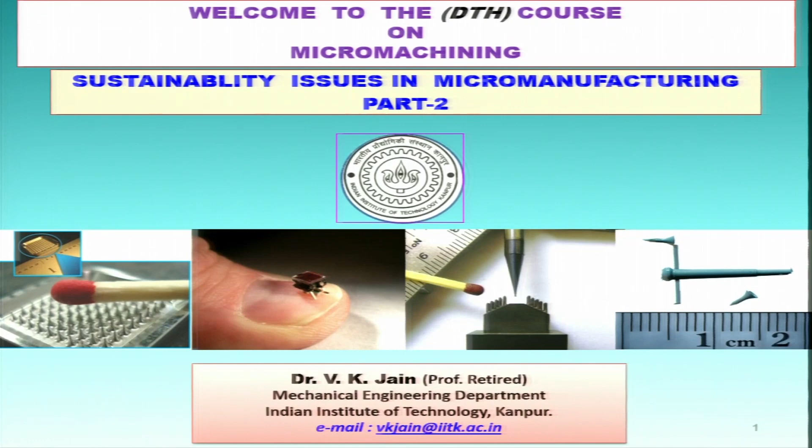Welcome to the DTH sponsored course on micromachining. This is part 2 of sustainability issues in micromanufacturing. Acknowledgement to the lecture by Professor Anshudhar Chayal, a chapter written by Professor Anshudhar Chayal of IIT Ropar, and a chapter written by Professor M. Ravi Sankar et al. from IIT Tirupati, who has also shared some of the slides for his lecture delivered on sustainability issues.

Now this is my last lecture in this course, so I will once again like to share this slide with all of you: to fulfill your ambitious dreams, be honest, sincere, hardworking, and have junoon, that is passion, towards your objective. This will be very useful learning for your career.

What has been done in part 1 of sustainability issues in micromanufacturing? If you recall, we discussed two major issues and the definition of sustainable futuristic manufacturing. Note it carefully: futuristic manufacturing has to be sustainable manufacturing if it is to survive for a long period. We also discussed miniaturization and green manufacturing.

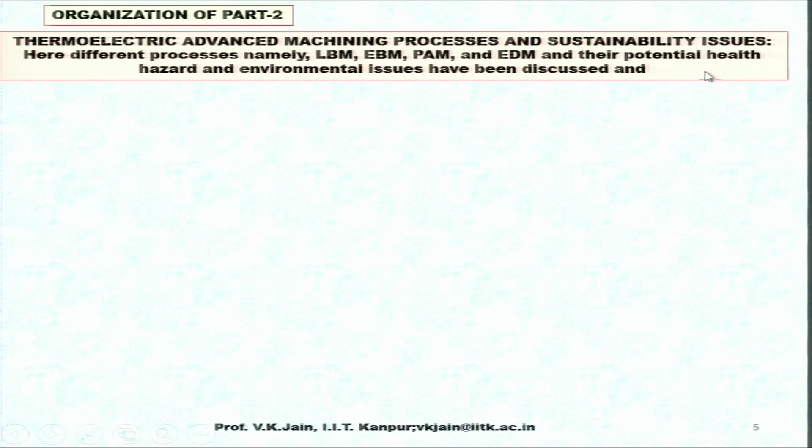Now, organization of part 2: we are going to discuss in detail thermoelectric advanced machining processes and sustainability issues, which will include laser beam machining, electron beam machining, plasma arc machining, and electric discharge machining, and their potential health hazards and environmental issues will be discussed in this particular part.

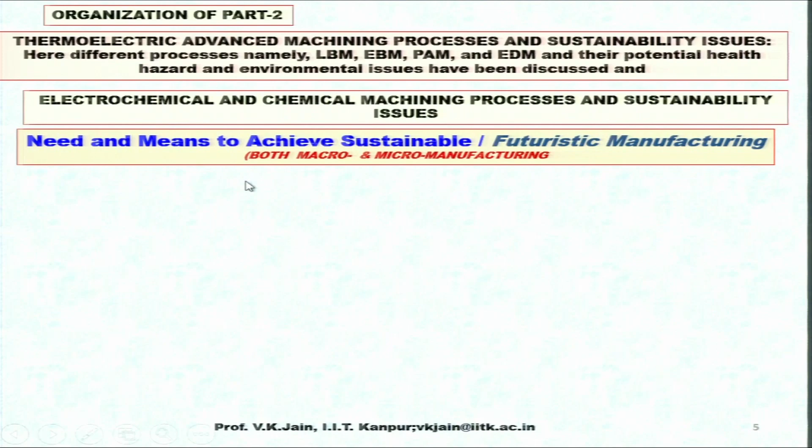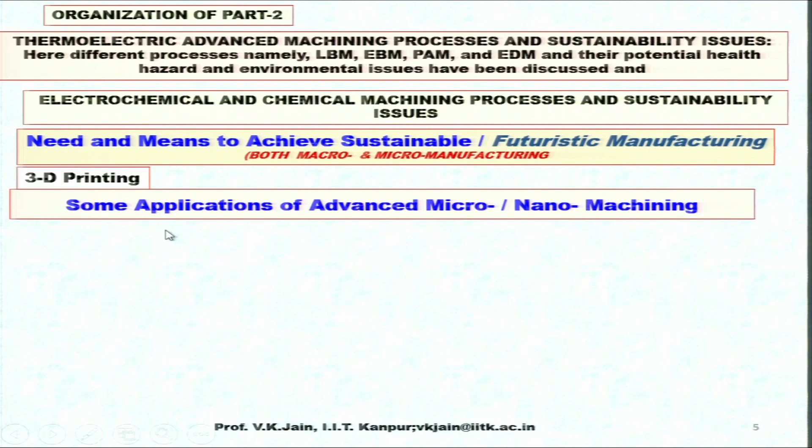Electrochemical and chemical machining and micromachining processes and sustainability issues, the need and means to achieve sustainable futuristic manufacturing. We will discuss 3D printing, some applications of advanced micro nano machining, and conclusions.

Thermoelectric advanced machining processes and sustainability issues. Plasma arc machining and sustainability issues.

The arc energy is absorbed by the workpiece material and it produces a high temperature above the melting point of the workpiece material. Under these conditions, the work material quickly melts and may even get vaporized.

I am not going to discuss the working principle of any of these processes. I presume you have already gone through advanced machining processes or micromachining, where I have discussed their working principle with reference to micromachining. For machining organic materials by plasma arc machining, it necessitates large amounts of inert gases which are harmful to the operator and the environment.

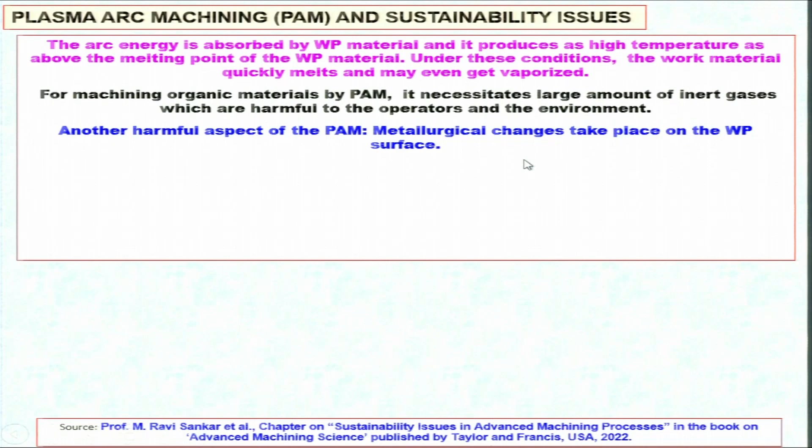Another harmful aspect of plasma arc machining: metallurgical changes take place on the workpiece surface. When it is melting and vaporizing, definite metallurgical changes are taking place on the surface and subsurface of the workpiece material. In plasma arc machining, volatile product formation takes place, evaporation takes place of the workpiece material.

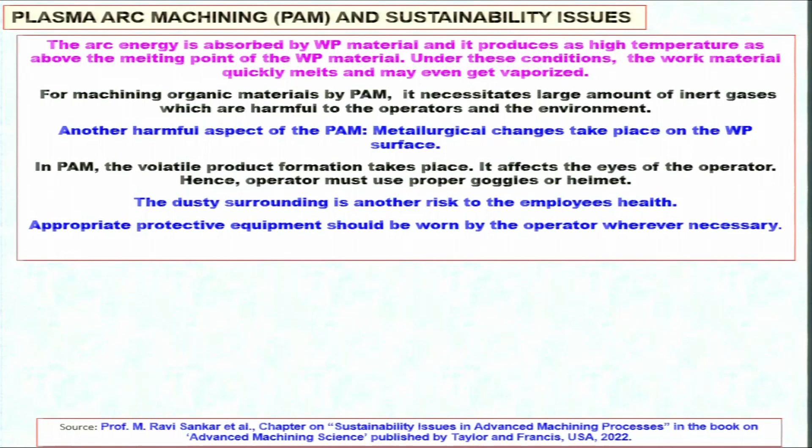It affects the eyes of the operator, a very important issue, and one has to be very careful. Hence, the operator must use proper goggles or helmets. The dusty surrounding is another risk to the employee's health, and appropriate protective equipment should be worn by the operator wherever necessary. This becomes the responsibility of the operator, not to work on these processes without appropriate protective equipment, just like goggles, helmets, etc., whatever is required.

You can see here, this is the plasma gun, the plasma arc is there, and you have dust uplifted due to plasma jet velocity in this tube. You can see particle-plasma interaction taking place here, leading to particle inhalation. Once this inhalation by the operator takes place, you can see micro nanoparticles going inside the human body and creating a lot of problems for the operator, and not only the operator but also the workers or people working surrounding this particular equipment. So you can see here dust inhaled due to plasma jet velocity.

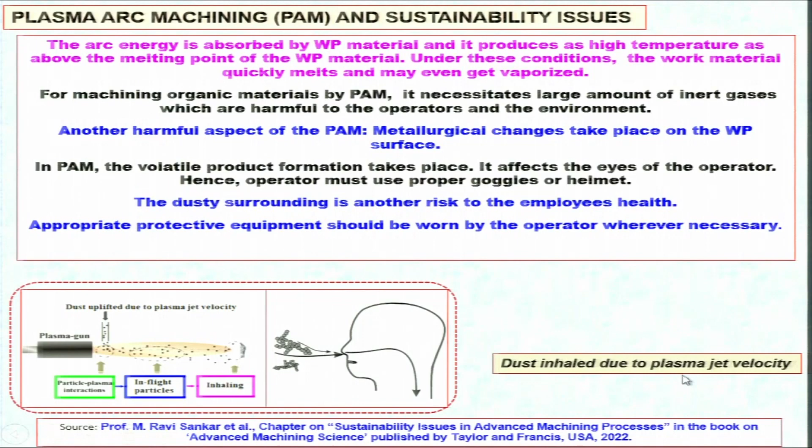Laser beam machining and sustainability issue. Laser beam machining and laser beam micromachining is one of the most popular micromachining processes, and we should understand the hazards from this particular process.

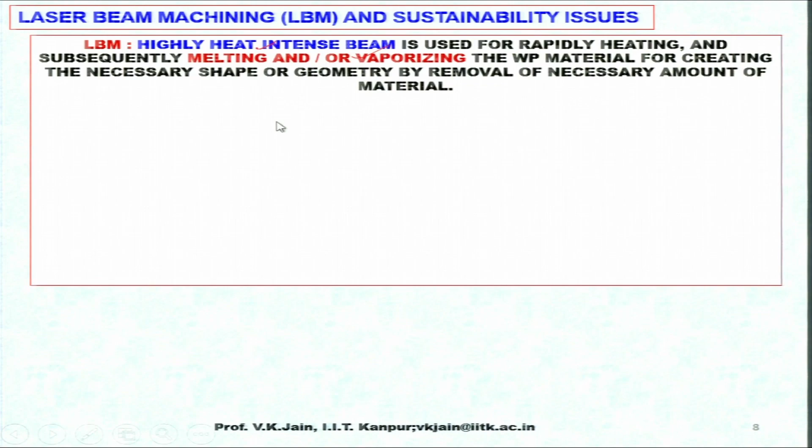Laser beam machining uses a highly heat intense beam. It is used for rapidly heating and subsequently melting and/or vaporizing the workpiece material for creating the necessary shape or geometry and dimensions by removal of the necessary amount of material. So you can see carefully, melting is taking place and vaporization is also taking place, and because of vaporization, fumes will be there in the surrounding, and operators and persons standing around this equipment have to be very careful.

Single or repeated exposure to certain wavelengths of the laser damages the skin and other body parts. So one has to wear proper clothing, etc., to safeguard from this.

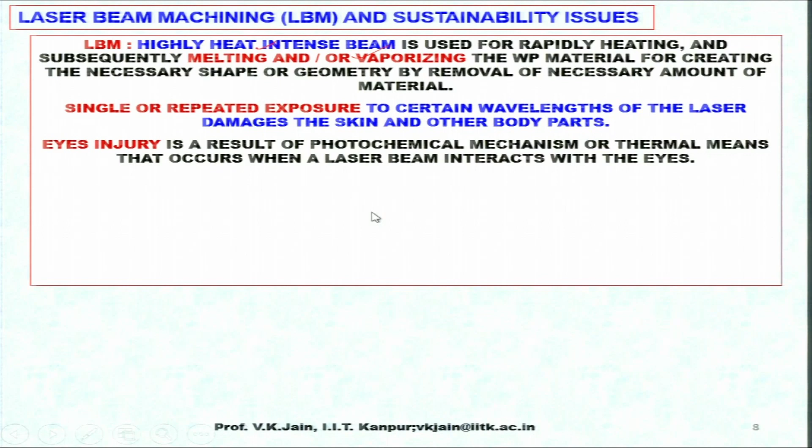Eye injury is a result of photochemical mechanism or thermal means that occurs when a laser beam interacts with the eyes, and this is very highly possible damage that one can have in the eyes because of little bit of carelessness on the part of the operator or the person surrounding there.

For minimizing the probability of laser beam exposure, a set of protocols and regulations designed for this purpose should be strictly followed. These protocols and regulations should be strictly followed, otherwise you are putting yourself into danger.

If a beam enters into the eyes, the power of the beam is concentrated with the aid of the lens within the eyes about 0.1 million times more at the retina. Hence, even a small amount of the laser beam leads to big damage to the eyes. So this is a warning to the operator and those who are using this laser beam for some other purposes also.

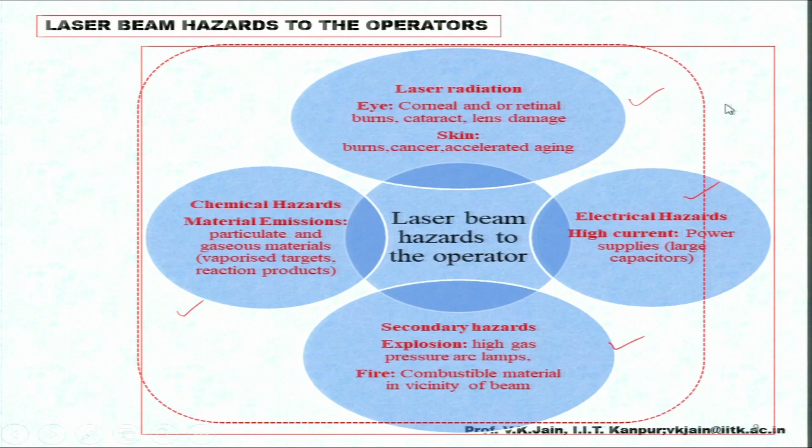Electron beam machining and sustainability issues. In electron beam machining, again very much useful for micro nano machining purposes, not so commonly used for macro and meso machining, a stream of large number of electrons moves as a small diameter beam towards the anode, that is the workpiece material.

The workpiece attains very high temperature by the bombardment, meaning the workpiece gets melted and/or vaporized depending upon the thermal properties of the workpiece material. In the bombardment area, the high velocity electrons move close to the light velocity.

So you can calculate, whatsoever small is the mass of the electrons, or negligible mass of the electrons, it is moving with the velocity of light. So half mv square you can calculate as the kinetic energy, which will be large enough. So the high velocity electron beam strikes the workpiece, the kinetic energy of the electrons gets converted into heat. This heat is responsible for melting and vaporization of the workpiece material.

So it is a very good process for micro nano machining feature creation. Electron beam machining is a cleaner process of machining, but the interaction between the workpiece material and the beam of electrons

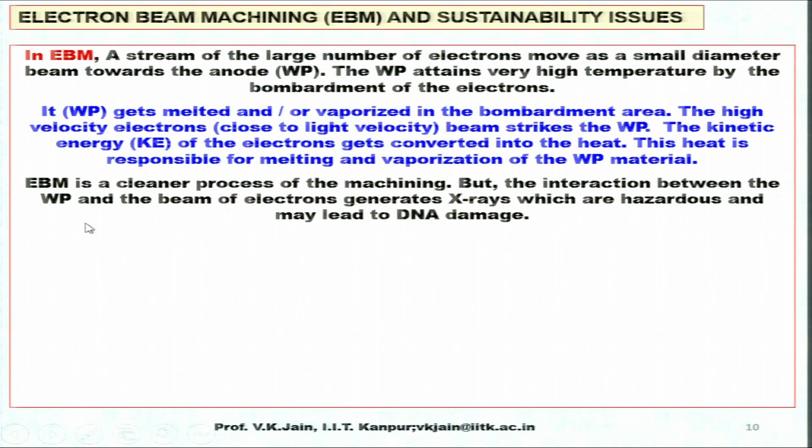generates X-rays which are hazardous and may lead to DNA damage. This is another high disadvantage of this particular process. DNA damage is of primary concern for health and safety of the operator in case excessive leakage is there.

Measures that should be taken into consideration for preventing any hazards of health: first thing is install the setup within an enclosure properly. This is very, very important. All the setups related to this should be installed in a properly made enclosure.

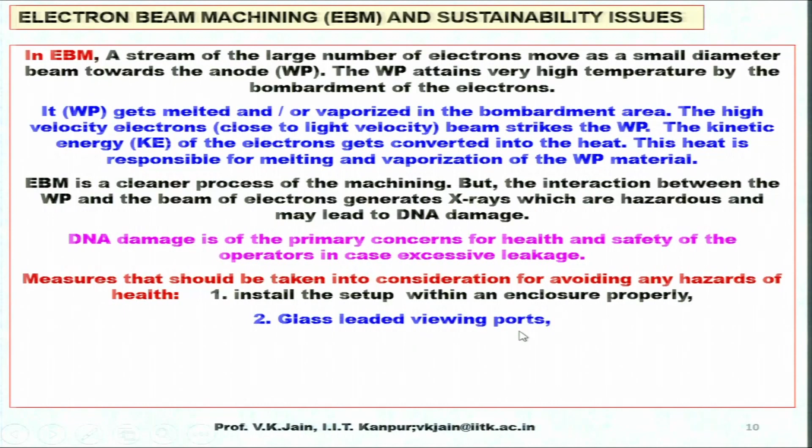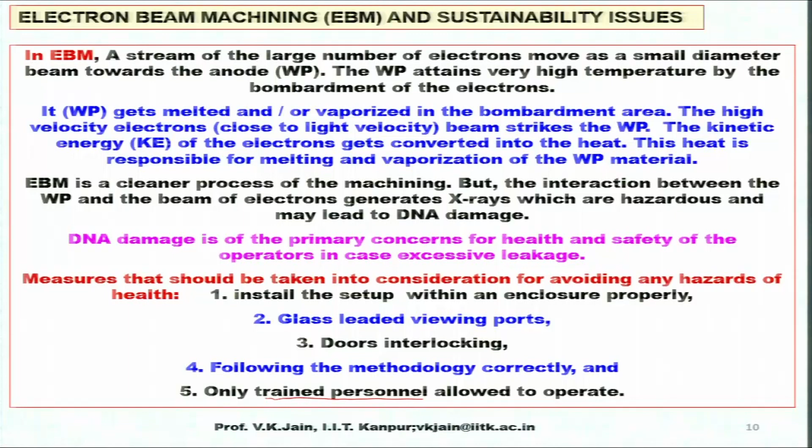Then a glass leaded viewing port should be there. You should not directly view the beams, etc. Glass windows should be there for viewing the workpiece as well as the beam. Doors interlocking should be there, and the methodology should be followed correctly, and only trained personnel should be allowed to operate. Please note it, only properly trained personnel or operator should be allowed to operate this particular equipment.

Electron beam machining and health hazard continues further. Another potential hazard associated with electron beam machining is the generation of dust due to vaporization of metallic workpiece material.

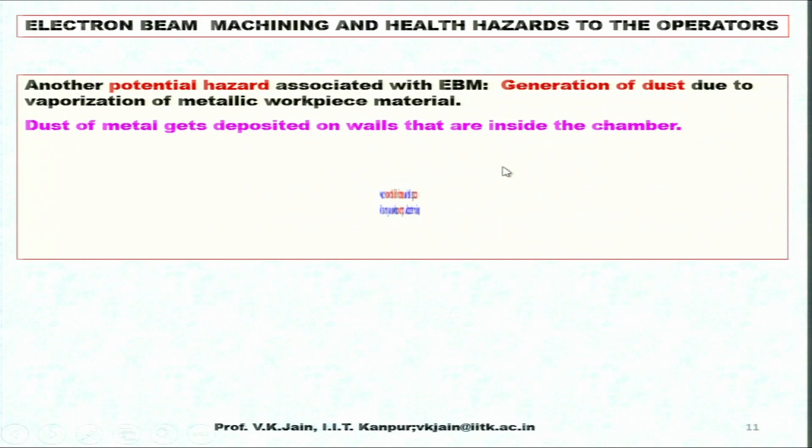This is another very important but worth noting hazard. Dust of metal gets deposited on walls that are inside the chamber. The operator is exposed to the dusty environment when the workpiece is positioned in that particular chamber before machining, and also

when collecting or taking out the workpiece from the chamber after machining is over. The operator is getting exposed to that environment, so he or she should be careful not to get hurt from a health point of view. High voltage associated with the electron gun also presents potential health issues due to electric shock.

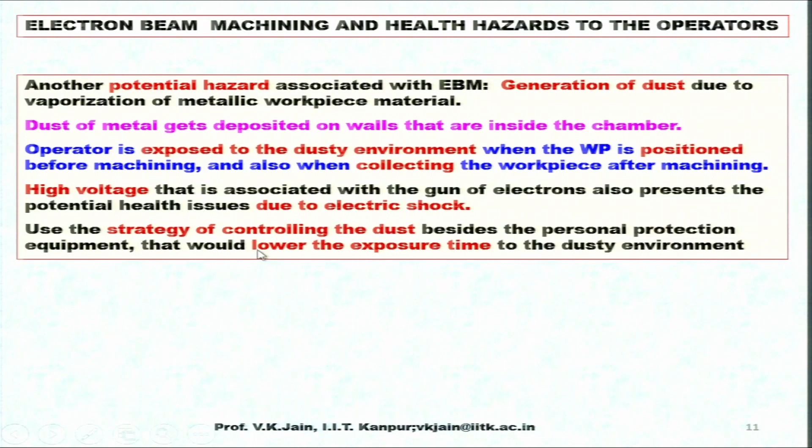Use the strategy of controlling the dust, besides the personal protection equipment, would lower the exposure time to the dusty environment. So all these precautionary measures should be carefully taken, carefully imposed, and this becomes really the responsibility of the concerned higher authority in those industries.

Electric discharge machining and sustainability issues. EDM is one of the processes most commonly used on the shop floor of small scale industries, large scale industries, as well as medium scale industry. So the health hazards should be very clearly understood, and necessary precautionary measures should be imposed in all industries for the benefit, for the welfare of the employees.

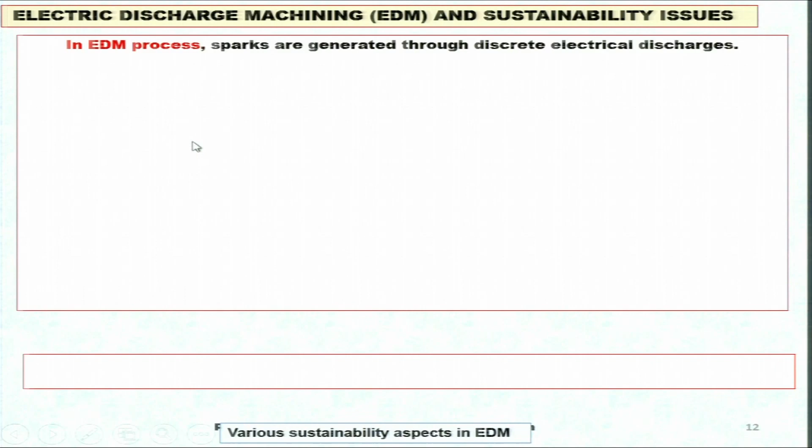In EDM process, sparks are generated through discrete electrical discharges. They ionize the dielectric medium, which may be kerosene or other oil, mineral oils, or even water, and generate a plasma column between the electrodes, that is anode and cathode. The sparks, that is plasma, result in extremely high temperature in the range of 8000 to 12,000 degree Kelvin. It locally melts and even vaporizes the workpiece material to remove the material.

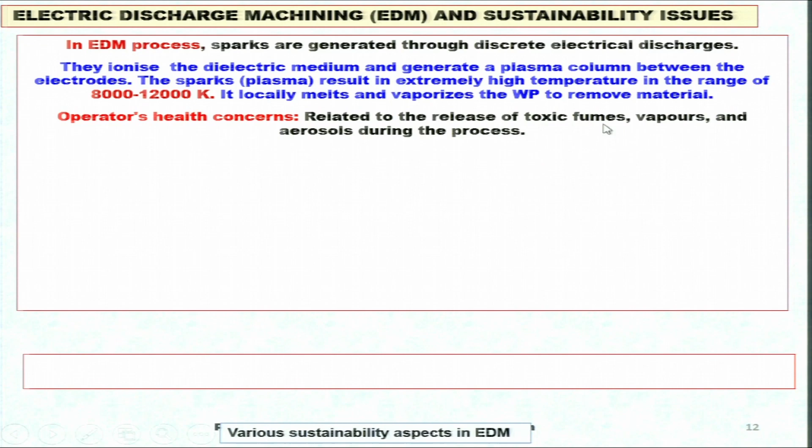So operators' health concerns are related to the release of toxic fumes when machining, depending upon the workpiece material. Different toxic fumes are generated and evolved, and many times operators are exposed to them if a proper exhaust system is not there. So these are related to the release of toxic fumes, vapor and aerosols during the process.

Poor functional safety may result in fire hazard. In many industries, fire has taken place due to this EDM process, so one has to be very careful. Electromagnetic radiation is another hazard.

Unwanted outcomes include radiation, noise, eroded particles from the workpiece and their emission. Dielectric fluids of synthetic and hydrocarbon based oil emit benzene fumes and vapors, polycyclic aromatic hydrocarbons. So these are all harmful to the operators and the people standing around it.

Other harmful byproducts include non-specific aliphatic hydrocarbons, mineral aerosol vapor due to degradation of oil and dissociation of their additives, and dielectrics are responsible for the risk of fire explosion, hazardous emissions, sludge generation, toxic waste, high specific energy, uneven electrode wear, poor surface characteristics and slow machining rate.

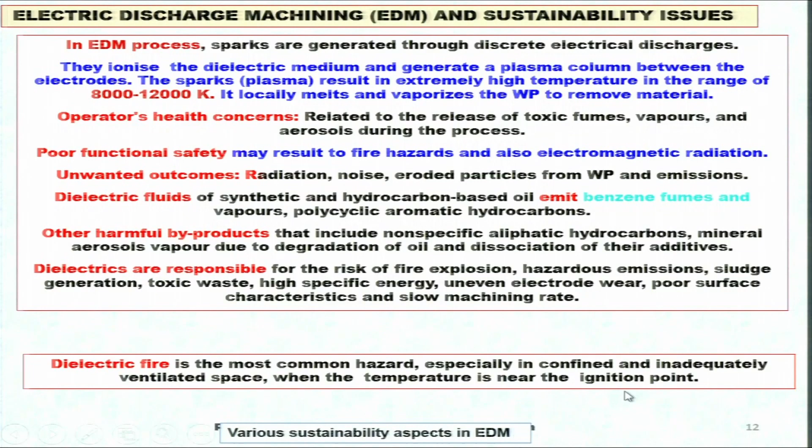Dielectric fire is the most common hazard, especially in confined and inadequately ventilated space when the temperature is near the ignition point.

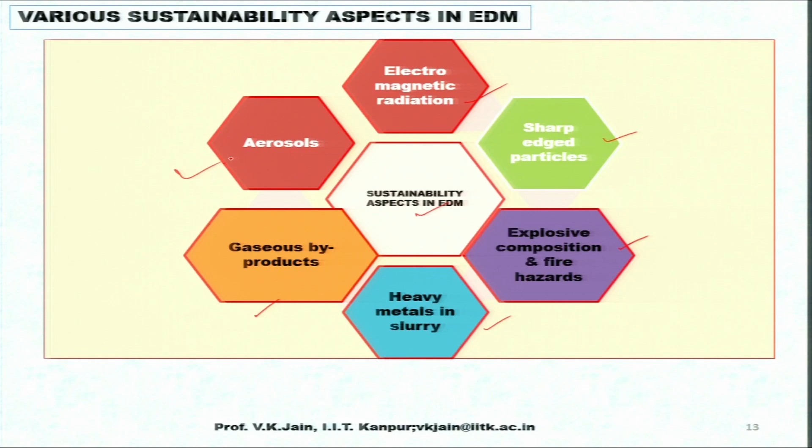Explosive composition and fire hazards, heavy metals in slurry, that is dielectric, gaseous byproducts. With this you should very carefully filter out and process before reusing the dielectric, because dielectrics are always resupplied or reused, and they are quite expensive. So there are various sustainability aspects in the EDM process.

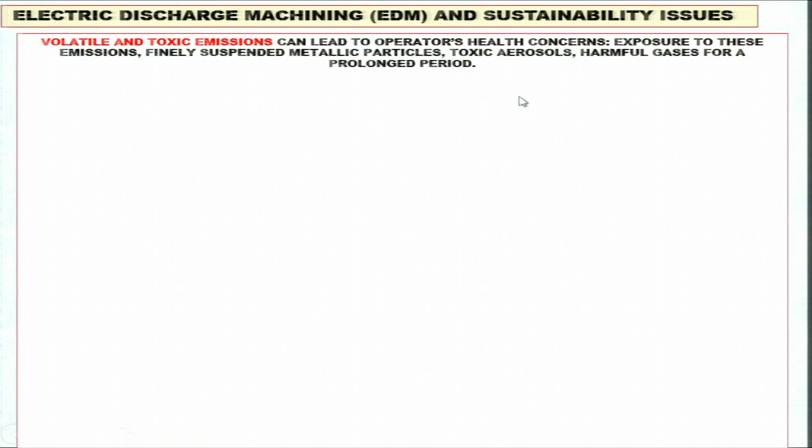Volatile and toxic emissions can lead to operators' health concerns. Exposure to these emissions, finely suspended metallic particles, as we have seen in the earlier slide, toxic aerosols, harmful gases for a prolonged period - if you are subjected to harmful gases and all these particles for a longer period, you may definitely have some or other kind of health problems.

So be careful, use proper equipment to safeguard yourself. Flammable and combustible dielectric and dangerous electromagnetic radiation are additional sources of hazard, because earlier kerosene was quite commonly used for this particular purpose, not now.

Other oils are also used for this purpose, and they should not be used here for the safety of the operator. Now manufacturers are making dielectric themselves and supplying it with the EDM machine, so that some of these hazards are taken care of and do not occur.

EDM using dry gaseous dielectric results in numerous environmental and health concerns, such as micro nano debris in the breathing environment, sometimes interacting with mucus, foul smell of dielectric, etc.

In EDM with oil based dielectric, carbon content on the machined surface is roughly 4 times higher, while with deionized water the carbon content is 50% less. So in most wire EDM processes, mostly deionized water is used as the dielectric, and in EDM also at some places, users are using deionized water as the dielectric.

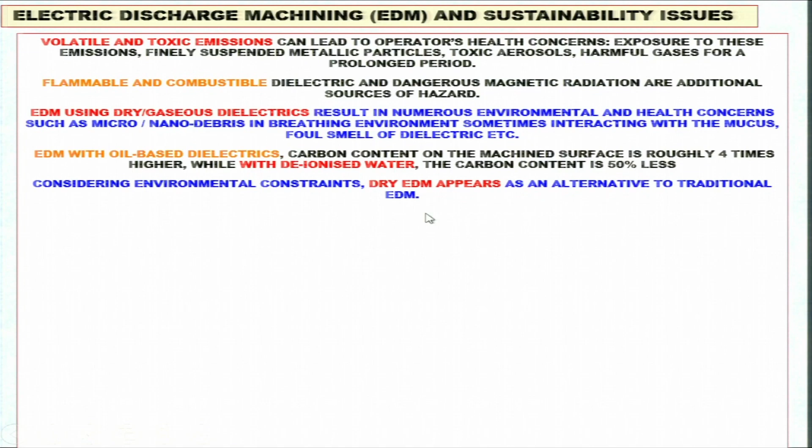Considering environmental constraints, dry EDM appears as an alternative to traditional EDM. Some research work was done long back, 20 years back or so, at IIT Kanpur also, performing dry EDM and looking into the merits and demerits of the process, accuracy of the machined component and shape, etc.

That was published also in some journal, I don't remember exactly at present. Hydrocarbon dependent dielectrics contribute significantly to environmental hazards. Henceforth, alternative dielectrics such as water dependent, gas based and dry EDM techniques have also been researched. When we conducted such dry EDM experiments long back, say 20-25 years ago, we emphasized why and how dry EDM is useful.

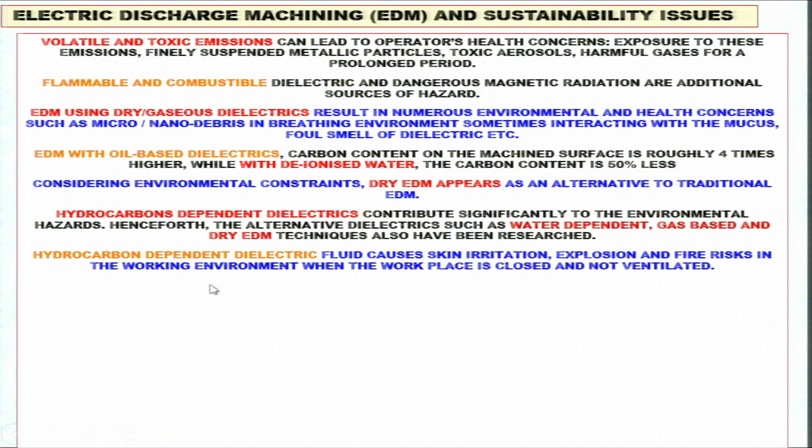But there are certain problems with dry EDM that can be overcome by researchers. Hydrocarbon dependent dielectric fluid causes skin irritation, explosion and fire risk in the working environment when the workplace is closed and not ventilated. This ventilation issue is one very big problem, and if not properly ventilated, you are unnecessarily inviting health hazards for the operator and persons working around the machine.

Let us see neem oil as dielectric. It minimizes the chances of gas emission during machining, and it aids in creating an oxide-free, hygienic breathing environment. Neem oil can be easily obtained, and though I don't know the exact price, I hope it should be cheaper than other oils, and it has many merits to be used as a dielectric. However, it really needs further research before its common use in the EDM process.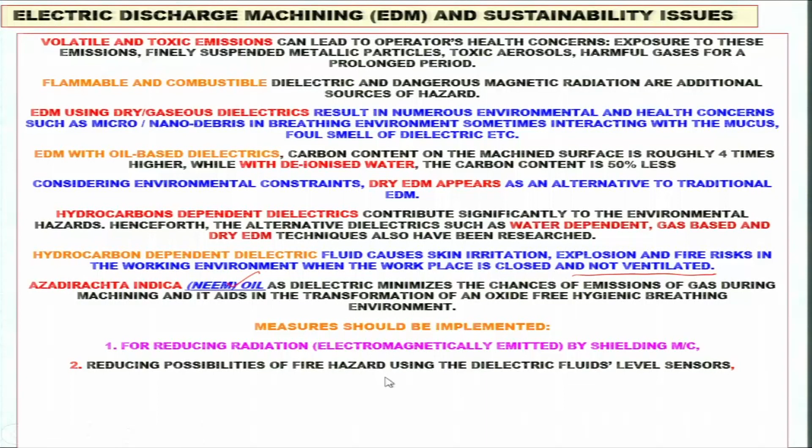What measures should be implemented for the safeguard of operators? For reducing electromagnetic radiation emitted, by shielding the machine; reducing possibilities of fire hazards using proper dielectric fluids and level sensors; avoiding the use of dielectrics having flash points of 65 degrees centigrade or below; applying suitable disposal of waste, which is another very important point; and raising awareness of operators for not using high voltage resulting in severe injuries or sometimes even death of the operator.

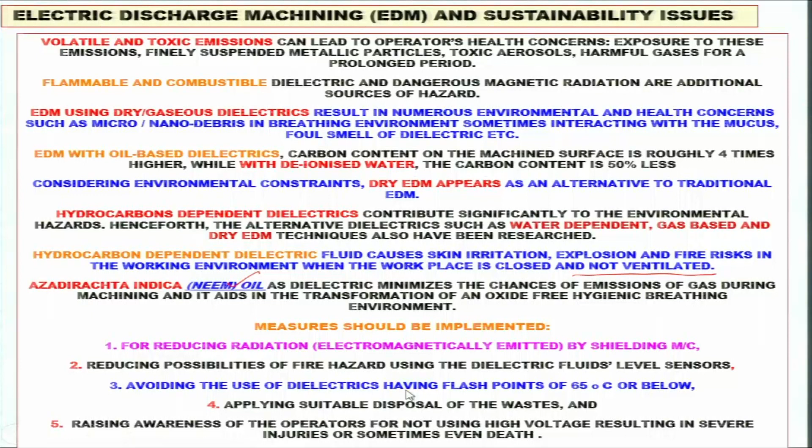So really speaking, I very strongly recommend you follow all these measures for the safety of the operator and surrounding people, and also not only operators or human beings, but also the equipment placed near such machines.

Conclusions: focus on improved technology R&D and on sustainable manufacturing is essential to enable sustaining our quality of life and safeguarding the environment. In the case of micromanufacturing, there is a serious lack of attention to this issue on the part of industrialists, government and policy makers in general, and researchers in particular.

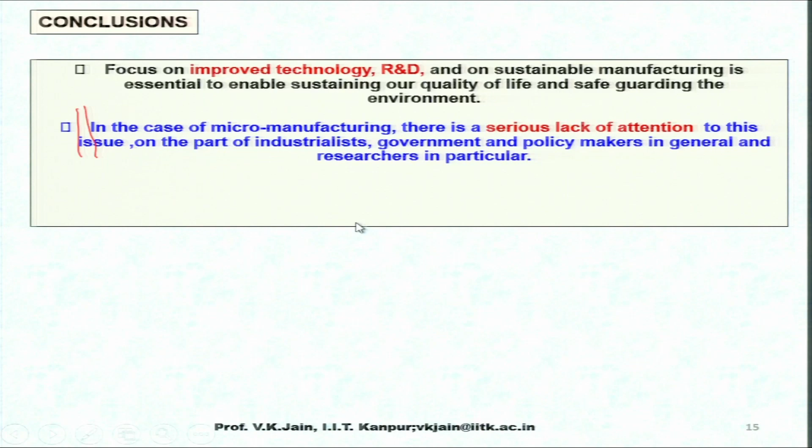I very strongly agree with this issue because I have not seen so much emphasis being given by industrialists investing additional money. Also, the government and policy makers are really least bothered about these issues, which is really not good.

Several strategies are possible, however, due to the complex nature of the market, very few broadly applicable solutions are evident. That is what I have just told you. Other than facility upgradation, process scale up and process optimization, which is being done by researchers, least is being done by industrialists, government and policy makers.

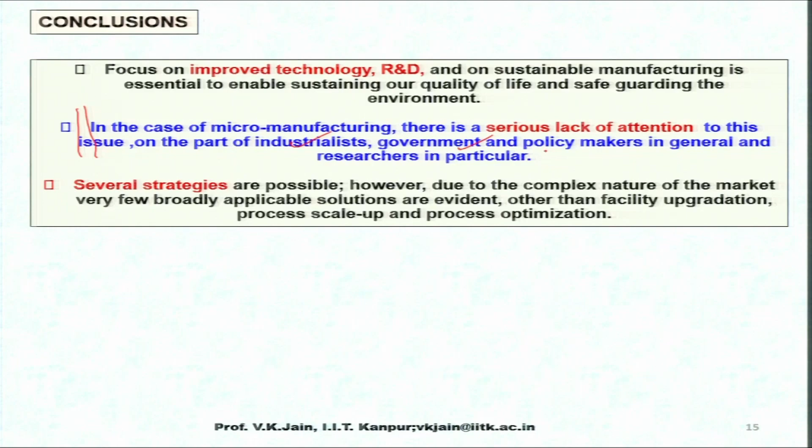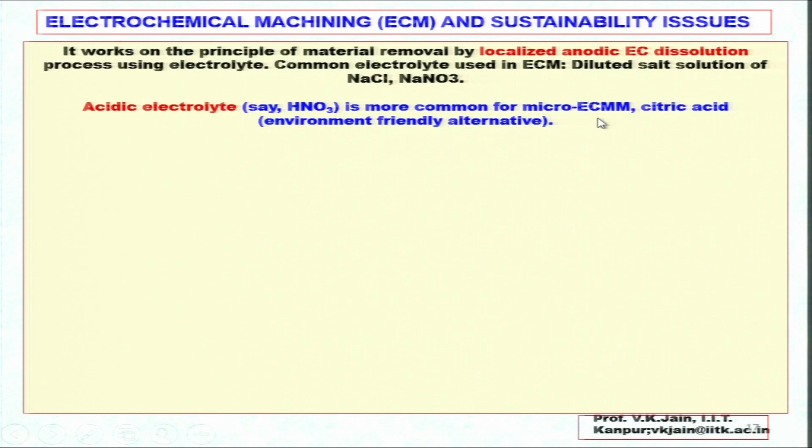Now let us take electrochemical and chemical machining processes and sustainability issues. It works on the principle of material removal by localized anodic electrochemical dissolution using an electrolyte. Common electrolytes used in ECM include diluted salt solutions of NaCl, NaNO3, etc. Acidic electrolytes such as HNO3 are more common for micro electrochemical machining. Citric acid is an environment friendly alternative.

This process produces many byproducts such as sludge having traces of heavy metals, metal ions, oils, nitrates and harmful acids. The electrolyte is contaminated by heavy metals and chemically altered byproducts such as hazardous ammonia, chromate and nitrate, because as we already discussed, during electrochemical reaction many types of byproducts are produced. They are known as sludge, and some of them are really harmful.

An efficient local exhaust system should be used so that hydrogen gas is kept below its lower limit of flammability and aerosols are kept out of the operator's respiratory tract. So a proper exhaust system in all kinds of manufacturing processes is always required.

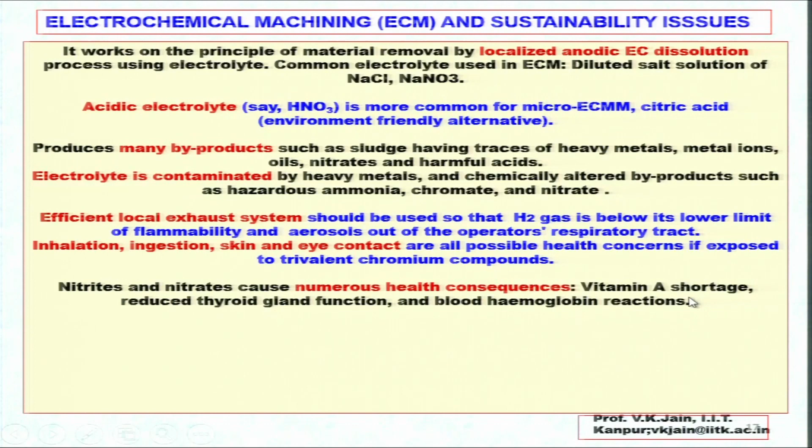Inhalation, ingestion, skin and eye contact are all possible health concerns if exposed to trivalent chromium compounds, and if machining is being done, you are going to have these compounds formed. Nitrites and nitrates cause numerous health consequences such as vitamin A shortage, reduced thyroid gland function and blood hemoglobin reactions. Toxic vapors generated during electrochemical dissolution of the workpiece material, electrolyte contamination and splashing are various occupational health hazards.

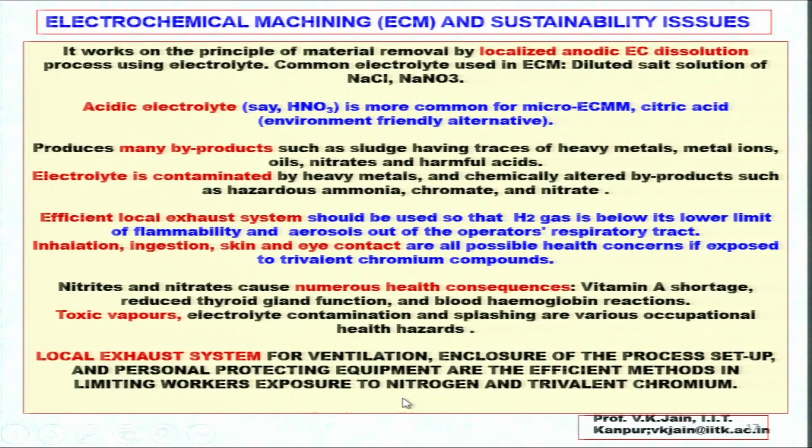Local exhaust system for ventilation, enclosure of the process setup, and personal protective equipment - all three are very important. Ventilation, enclosure of the setup and personal protective equipment are efficient methods in limiting workers' exposure to nitrogen and trivalent chromium.

We continue with this. ECM also uses acidic electrolytes like HClO4, HCl, H2SO4 and HF. It depends upon which material you are going to machine; accordingly, you have to choose the right kind of electrolyte, in this particular case the acidic electrolyte.

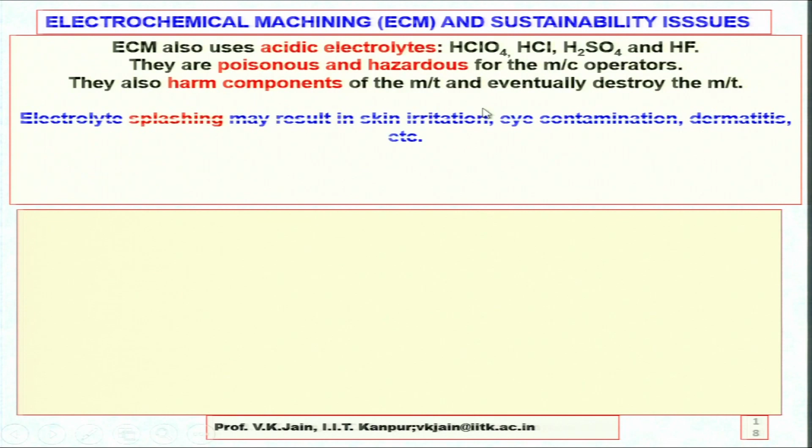These electrolytes are poisonous and hazardous for the machine operator. They also harm components of the machine tool and eventually destroy the machine tool and surrounding machine tools. Electrolyte splashing may result in skin irritation, eye contamination, dermatitis, etc.

Inhalation of smoke or gases which are exposed during the electrochemical dissolution of the workpiece material. Inhalation of smoke or gases produced by the use of chloride and nitrate based electrolytes for a long period can cause ingestion, kidney, liver, skin and eye related diseases.

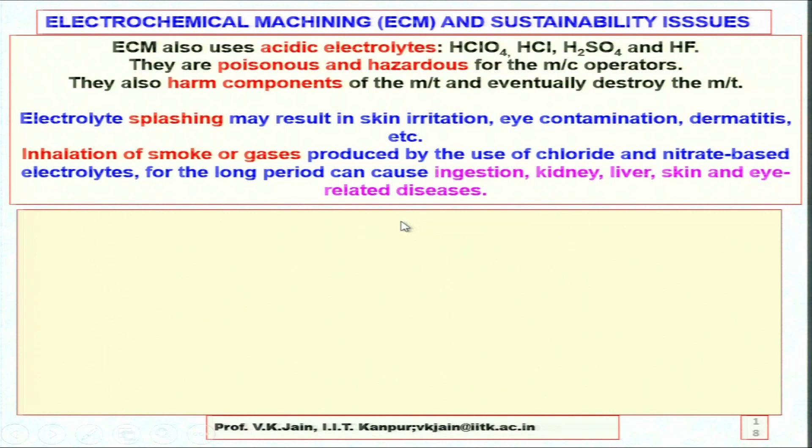Normal mineral water as electrolyte in the ECM process is a superior substitution of conventional acidic or basic electrolyte. This is a very important advice one should try to follow. I will even go up to the extent that even at the cost of machining, if you can use mineral water or deionized water, whichever is convenient, then that should be preferred, keeping in view the health hazard for the operator and the safety of the surrounding machines.

It is completely eco-friendly and non-corrosive in nature, resulting in greener ECM with higher efficiency besides precision at considerably low cost, because mineral water or deionized water are comparatively cheaper and you can recirculate them.

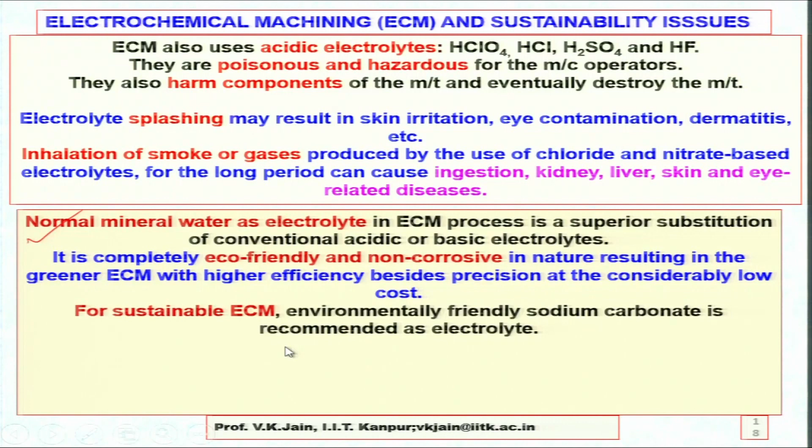For sustainable ECM, environmentally friendly sodium carbonate is recommended as electrolyte. Local exhaust is provided for preventing hydrogen gas concentration to the limit of flammability, besides removing the mist, that is volatile organic compounds inhalation, from the breathing zones of the worker.

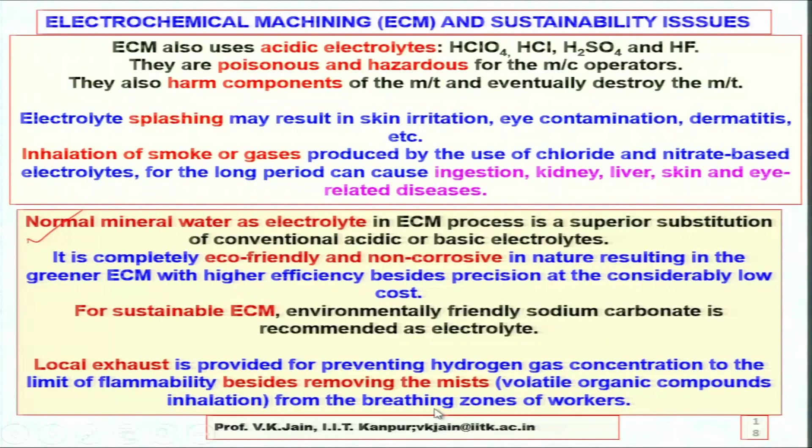So we can come to the next one, that is chemical machining and sustainability issues. Chemical machining uses acid as etchant. It adversely affects the environmental surrounding. It has shortcomings in storage, handling, besides damaging various materials. Chemical machining hazards depend upon the substance properties at the time of contact and concentration with the alkali and the acids, because machining takes place due to the chemical reaction.

Effects on health of labor: irritation, injuries due to corrosion, besides burns, severe damaging of the eyes, even leading to risks of lung cancer and larynx issues. These are quicker and very often irreversible problems.

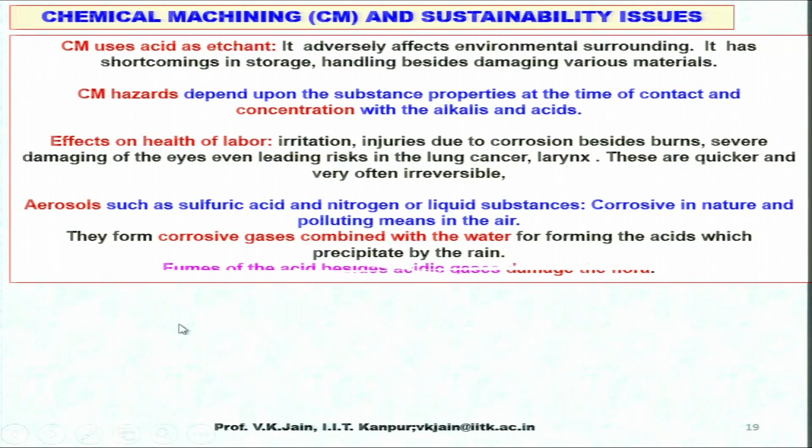Aerosols such as sulfuric acid and nitrogen or liquid substances are corrosive in nature and polluting in the air. They form corrosive gases combined with water, forming acids which precipitate by the rain. Fumes of the acid, besides acidic gases, damage the flora.

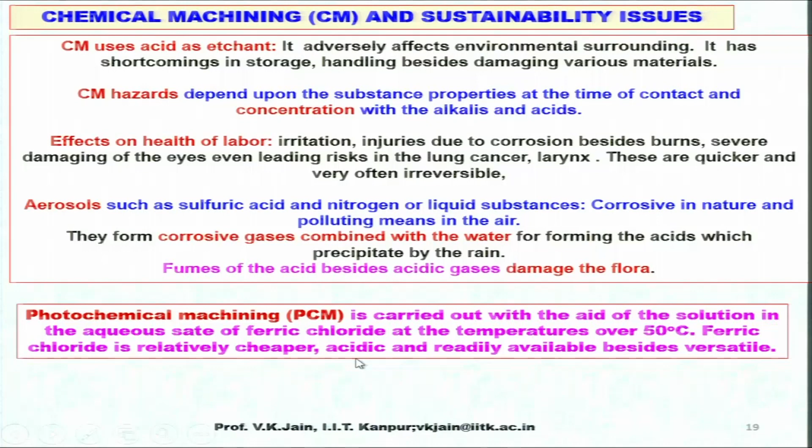Photochemical machining, again a very commonly used process in case of micro and nano machining, is carried out with the aid of a solution in the aqueous state of ferric chloride at a temperature over 50 degrees centigrade. Ferric chloride is relatively cheaper, acidic and readily available, besides versatile.

Now the next section is need and means to achieve sustainable or futuristic manufacturing. Manufacturing in general, and machining and micro machining in particular, is being discussed in these two lectures as I have already mentioned. Why is there increased focus on sustainability?

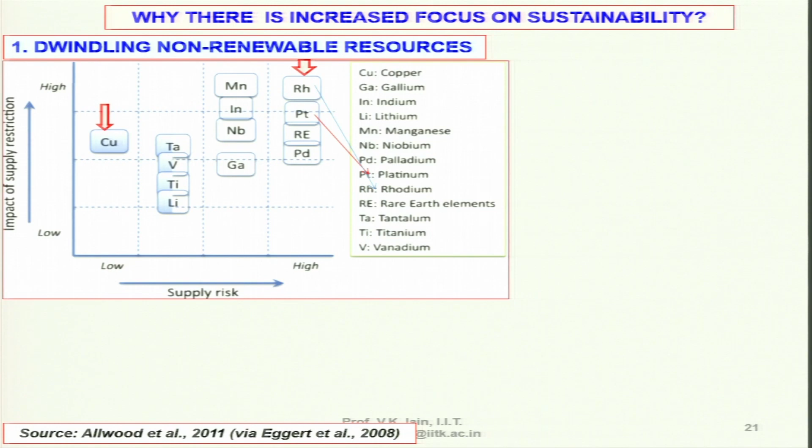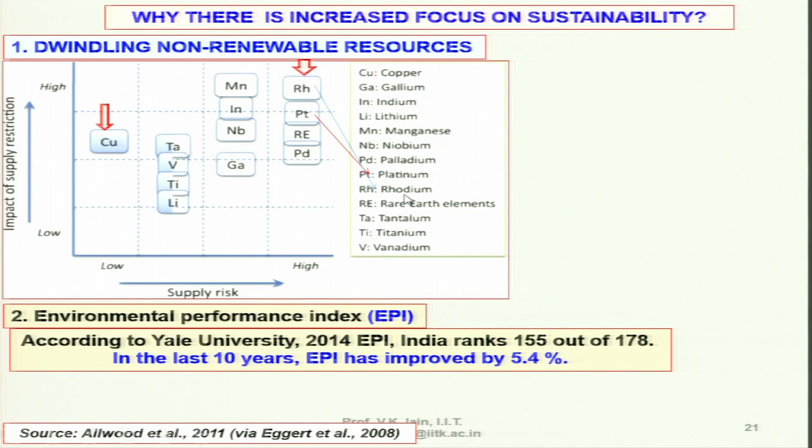Dwindling non-renewable resources. You can see here non-renewable resources are dwindling, and these are some of the materials that are dwindling, like copper, platinum, the whole list is there. So there is always a need for sustainability, and sustainability is not only an environmental or health problem, but there is going to be scarcity of these natural materials as listed.

So environmental performance index - this is very important advice - we should try to develop an environmental performance index and evaluate each process on this index, just like we evaluate tool material with the help of tool life. According to Yale University's 2014 EPI, India ranks 155 out of 178 countries. This simply means we are very poor in this particular case. In the last 10 years, the EPI has improved by 5.4%.

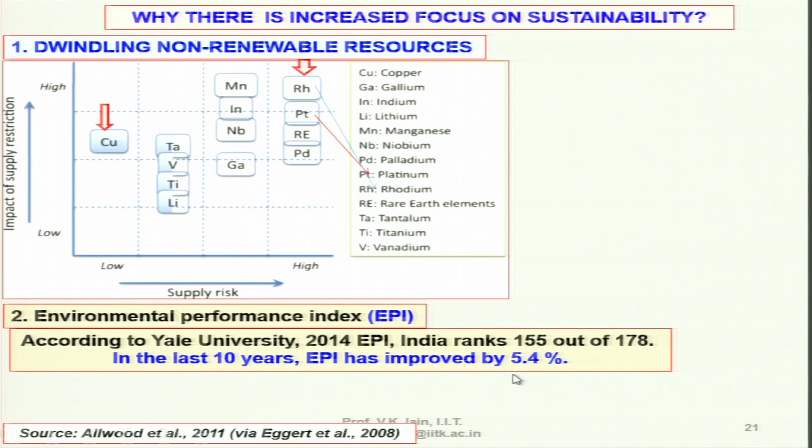Environmental problems: air pollution. China and India often get a lot of attention for their bad air quality, and rightly so. Cities in these countries have levels of harmful particulate matter way beyond healthy levels. We keep hearing and seeing on TV regarding certain big cities like Delhi, where most of the time health issues are there and air quality is very poor. Air quality in emerging nations is particularly bad, with industry the main cause.

This is one of the main causes, but there are other issues also, not only industry. In India alone, premature deaths from outdoor air pollution increased from 100,000 to 600,000 between 2000 and 2010. So this is a very alarming situation.

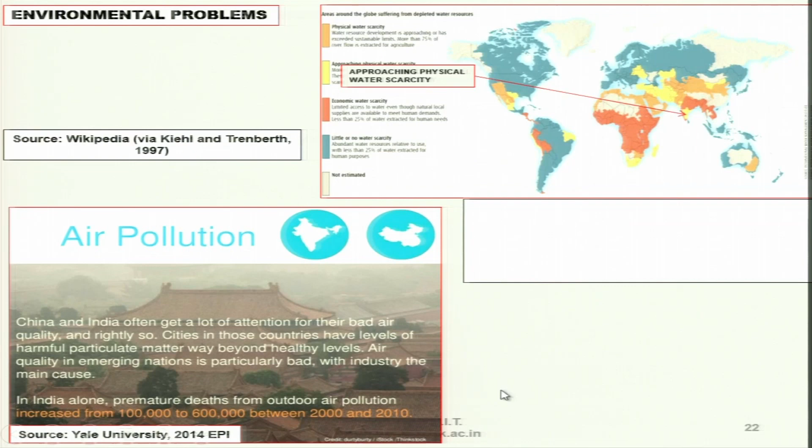Now you can see here, I have shown the picture, a world map, showing approaching physical water scarcity, and India is here, you can see in yellow color. That means in the near future we are going to have serious scarcity of water. And this is what our ex-late President Dr. APJ Abdul Kalam also warned the Indian nationals many times, that don't waste water, and this is what is going to happen. So environmental problems are there.

India economic water scarcity approaching physical water scarcity and so on. So many problems are there. One has to be very careful.

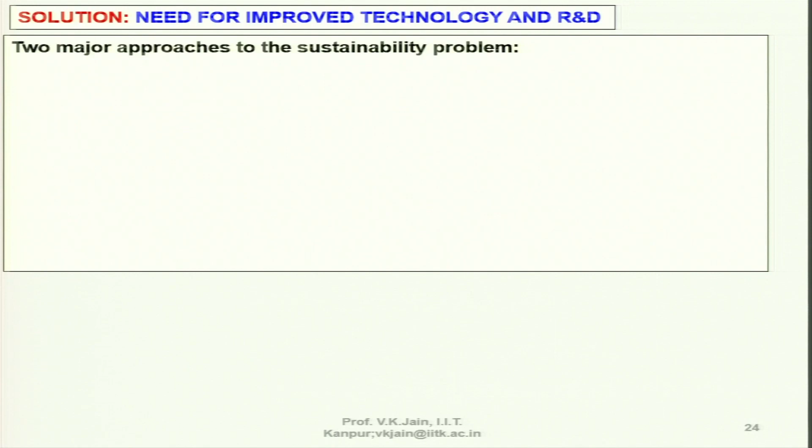Two major approaches for sustainability problems. Reduction in consumption, that is very, very important. However, developing countries not interested, because I can tell you North America or America and European countries, they don't believe much in this, and they use and throw, once use and then throw culture is there, which now they are also changing.

They are going back to what India used to do, and what India is doing, that is recycle the same product by modifying it or by reusing it again and again.

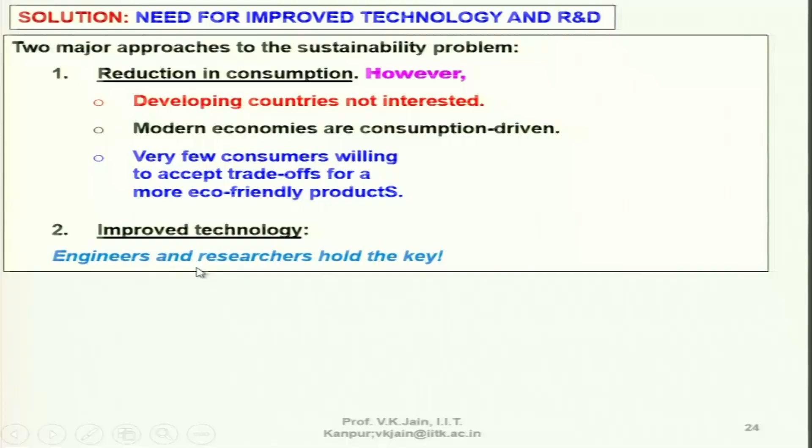Modern economies are consumption driven, and very few consumers are willing to accept trade-off for a more eco-friendly product. This is another very important issue, that consumers rarely see what are the eco-friendly products that they should purchase. And improved technology, which is the responsibility of engineers and researchers, they hold the key.

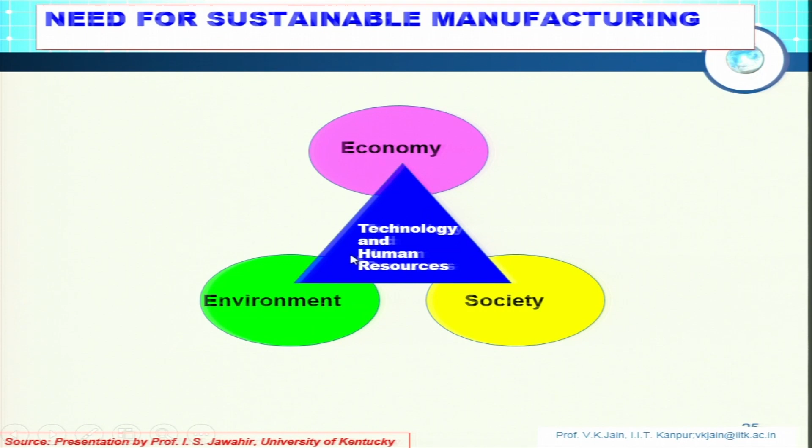Need for sustainable manufacturing, these are the four pillars: technology and human resources, economy, environment, and society. All the three are very important along with technology. So technology should be based for economy, environmental friendliness, and society friendliness also.

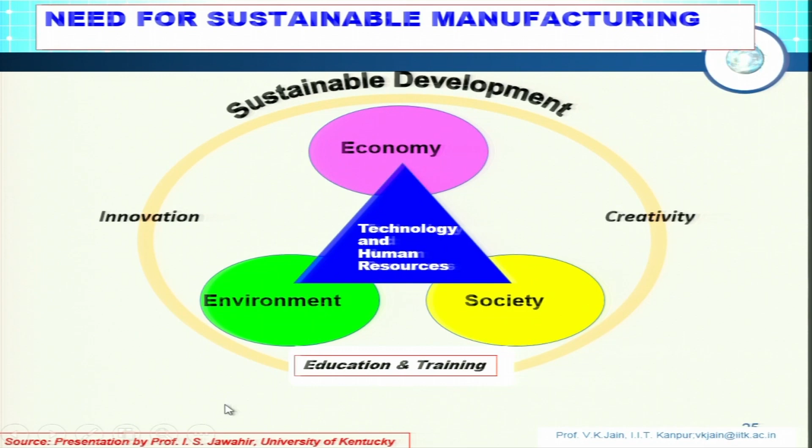So you have sustainable development, innovation, creativity, education and training, and they should center around these things. This is from the source Professor Jawahir of University of Kentucky. Some slides are from there.

Sustainable manufacturing, elements and scope: products, processes, systems, and all of them are connected. All the three should be concentrating on taking care of sustainability of the manufacturing processes. Sustainable manufacturing, then only people can survive. Doesn't matter whether system or product or processes, all the three have to be sustainable, or they should be believing

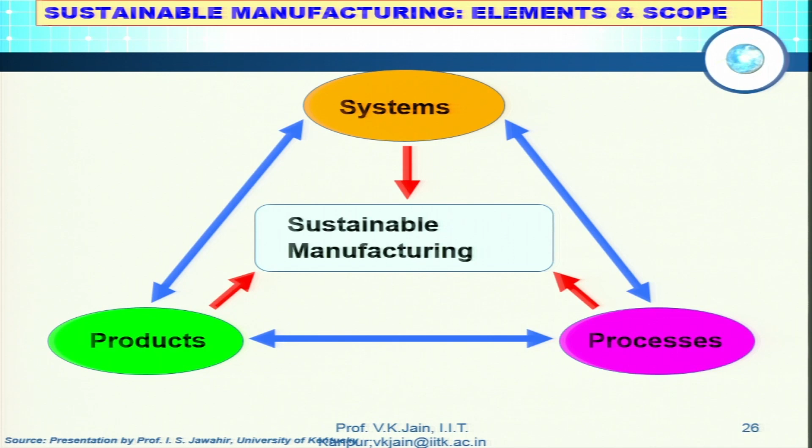and performing green manufacturing. Need for sustainable micro and nano manufacturing.

As you can see here, publications not very good, not very important, but people are concentrating now, and you can see total nano publications in red color, EHS nano in this color, and green is nano life cycle assessment and so on. So it simply indicates that research publications are also substantially increasing related to sustainability issues.

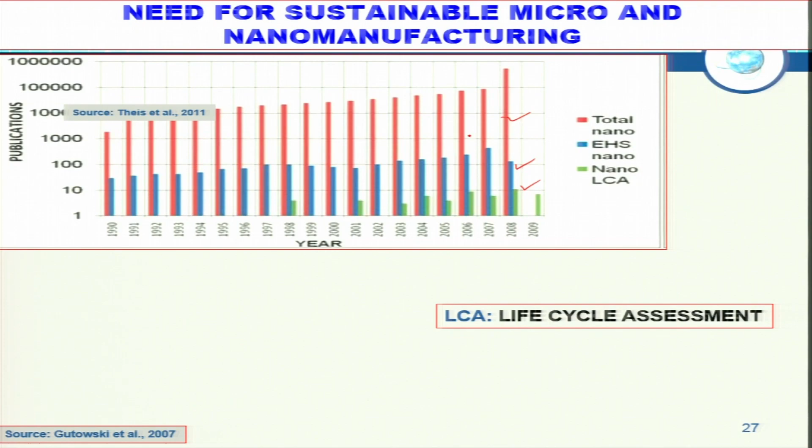Next, why do you need focus on sustainable manufacturing? There are certain reasons. Most of them we have already looked into. Manufacturing lies at the heart of industrialized economies, but maximum wastage per year takes place.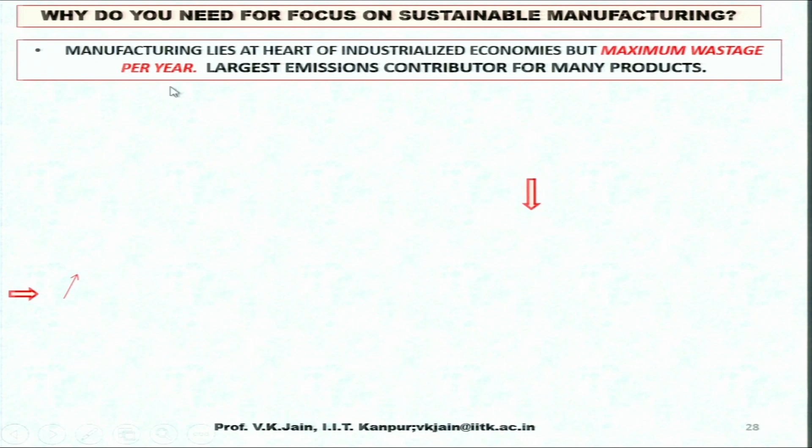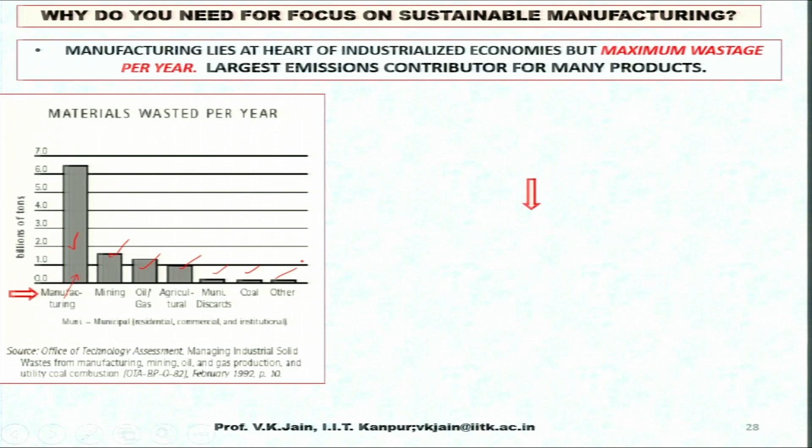Largest emission contributor for many products is manufacturing industry. You can see over here this billions of tons. This is the material wasted per year. It is billions of tons, and you can see maximum is from manufacturing over here. This is due to manufacturing, this is mining, this is oil and gas, agriculture, municipal discards, coal, other. So you can see maximum discharge, maximum wastage is from manufacturing only, especially that of material.

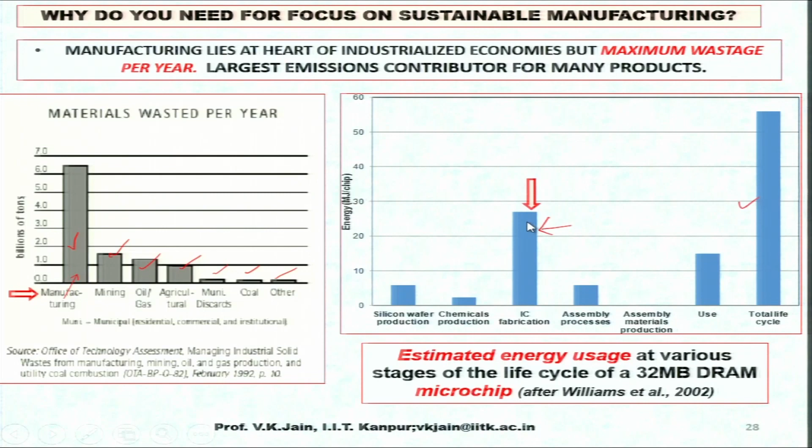You can see here estimated energy usage at various stages of life cycle of a 32 MB DRAM, etc. Now these are, you can see over here, this is IC fabrication, maximum quite a bit, this is the total. So don't consider, this is the total of this, and out of this, this is due to the IC fabrication, because IC fabrication is micro nano fabrication, and I have already told you that micro nano fabrication or micro nano manufacturing takes very large energy per unit production, because most of them are multi-stage production.

That's why many researchers, including IIT Kanpur, have developed some processes which are 1 or 2 step manufacturing processes rather than multi-step manufacturing processes like LIGA. So various researchers are working very hard to overcome some of these problems.

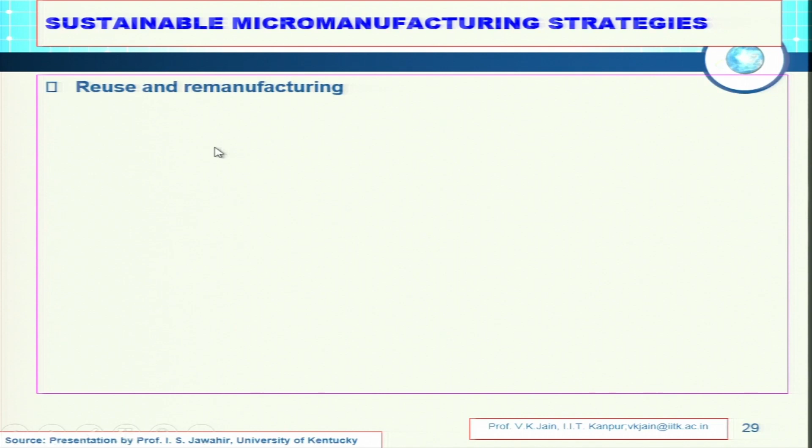Sustainable micro manufacturing strategies: reuse, very important, reuse and remanufacture. That is what we do in India, reuse the same product again and again, not just like Western culture that is use and throw. And also remanufacturing, now they are also adopting these two words, reuse and remanufacturing. In the Western world, they are now scientifically and systematically working hard on these two issues and they

You can see this now in India and other countries, automobiles manufacturers are not advising you to throw it away, rather they advise you to give it to the manufacturer at minimal possible cost. The manufacturer will reuse the parts which can be reused carefully and safely, and only whatever cannot be reused at all is thrown, the rest are reused.

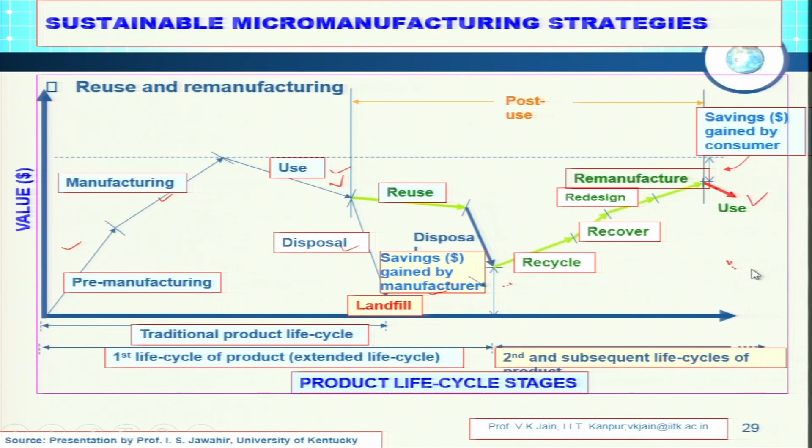Second and subsequent life cycle starts over there when we say over here. Energy requirement for different manufacturing processes.

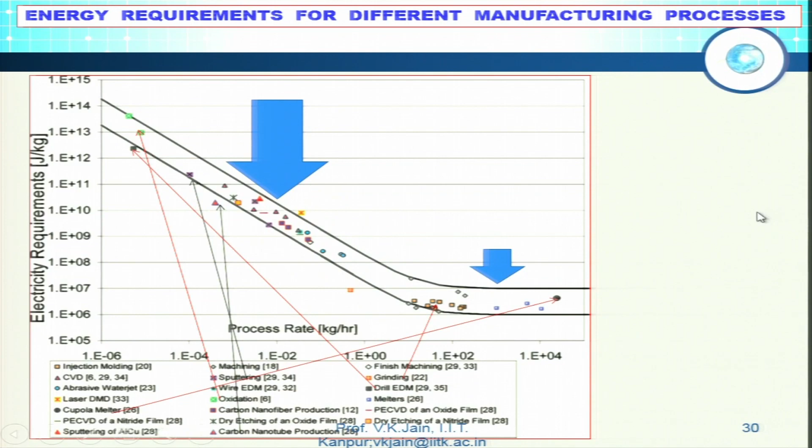Let us look at this very important diagram. I want to emphasize a comparison of specific energy required for various micro manufacturing processes. It also includes nano manufacturing processes relative to conventional manufacturing processes. Most of these processes lying over here are conventional manufacturing processes, and those lying over here are micro nano manufacturing or advanced manufacturing processes. You can see many times more energy requirement in these processes compared to conventional ones.

Order of reducing energy required: oxidation is taking maximum energy, then drilling EDM is second maximum, followed by sputtering, carbon nanotubes, CVD, dry etching, wire EDM, grinding, and so on.

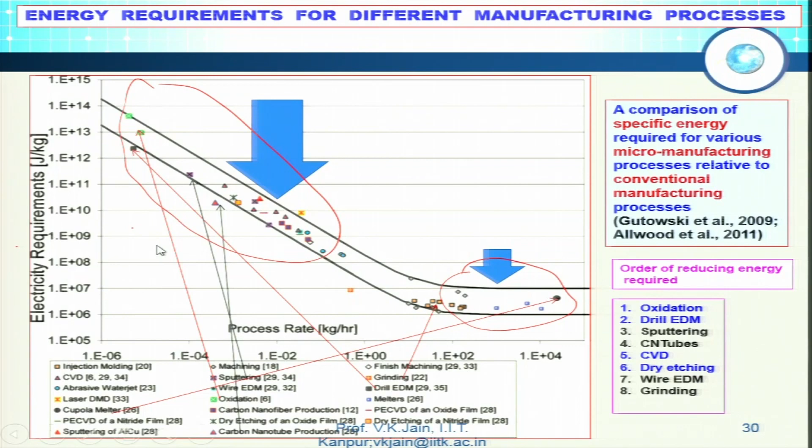One should try to remain in the low energy area, but that is not always possible. If you are going for micro nano manufacturing, you have to go into these higher energy processes. But researchers and scientists should try their best to modify these processes so that their energy requirement is reduced.

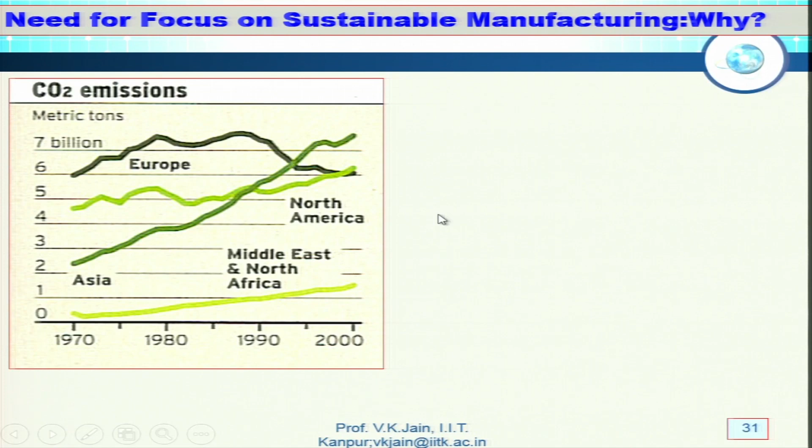But with time, Asia has crossed the others. By 2000, Asia is giving the maximum CO2 emission, exceeding that of North America and Europe.

These are some of the industrial ecosystems at Denmark which people are trying to work on, so that minimum CO2 emission and unfriendly gases are left in the environment. This is eco-industrial parks which are being developed. Gases evolved from here are used somewhere else, and surroundings are made with trees, etc., so that the environment doesn't get worse. This is a schematic view of evolving industrial symbiosis at Kalundborg.

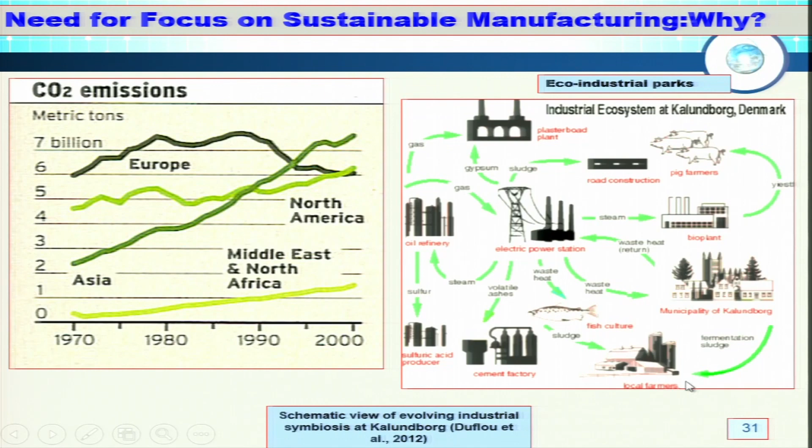Conclusions. To cope up in the race with advanced countries, any country has to spend enough money on innovative R&D activities. I have already shown you in one of the lectures that India is spending around $60 billion on R&D, while China is spending around $556 billion, which is more than even North America.

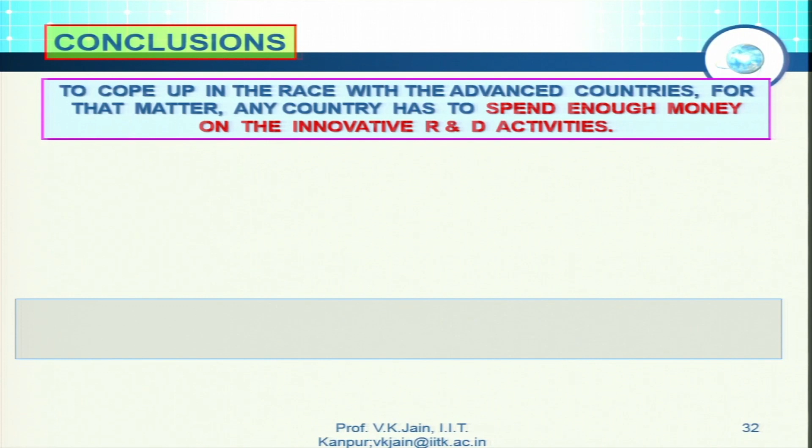So to be the leader in manufacturing, you have to spend a lot of money on R&D. No matter how much you spend on R&D, a dedicated team of young, intelligent, honest, hard-working and sincere researchers is always needed.

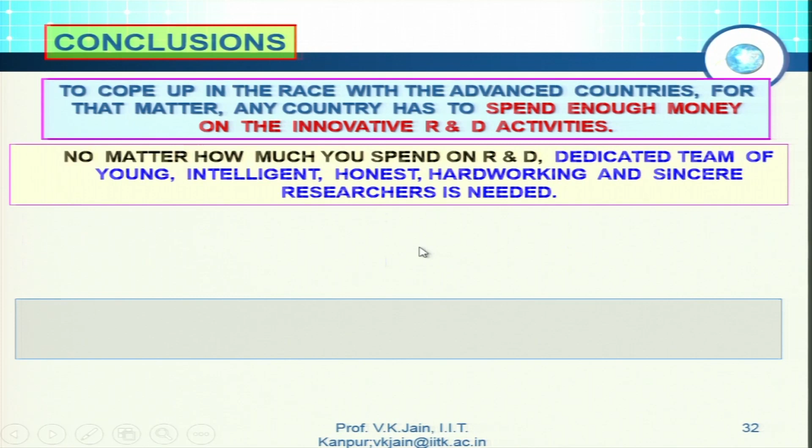Micromanufacturing and additive manufacturing will have an important place in the manufacturing industry in future, maybe after 5, 10, or 20 years. Additive manufacturing is going to be the leader of many manufacturing industries. Focus on improved technology, R&D, and sustainable manufacturing is essential to enable sustaining our quality of life.

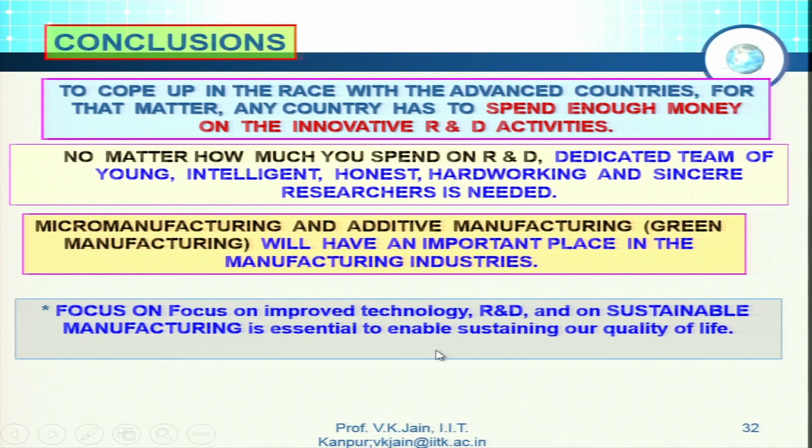In the case of micromanufacturing, there is a lack of attention to this particular issue on the part of R&D and industries. With this, I complete my last lecture on micromachining, and I thank you all for listening. Please note very carefully the last two lectures regarding sustainability if you want the survival of these micro nano manufacturing processes. Thank you very much once again.